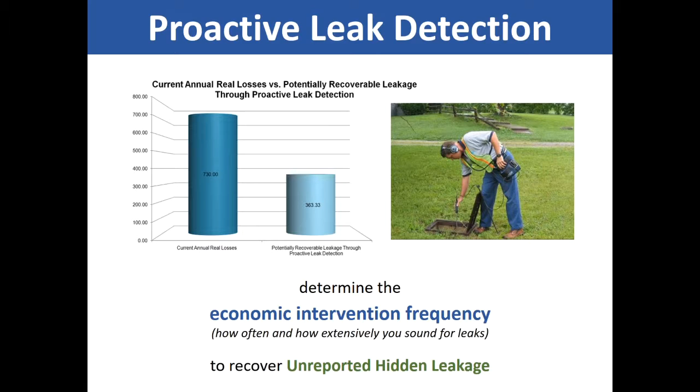So once this system starts proactive leak detection, they'll initially recover a lot of this volume of leakage. Much of it is cost-effectively recoverable for them. And then they will combat that trend of increasing leakage through time with periodic and scheduled surveying.

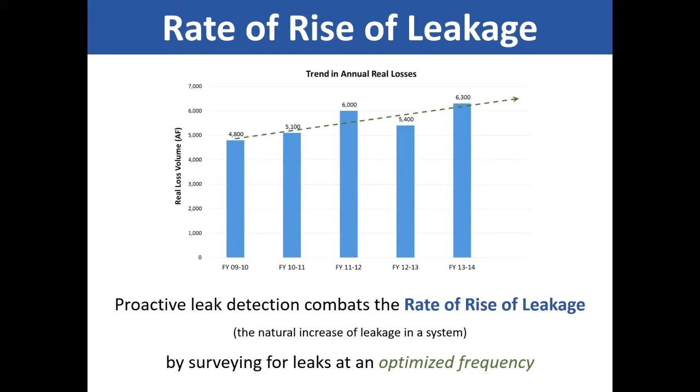Of course, when you're thinking about leakage, a lot of leakage results from overpressurization of the system. And so when you want to attend to all forms of leakage, whether background leakage, unreported leakage, or reported leakage, pressure management and engagement with your system's pressure dynamics will serve you well. Pressure management and optimizing the pressure dynamics of your system will reduce the frequency of your breaks, as well as reduce the volume lost to each instance of failure.

You'll want to think about how you know the pressures in your system before you intervene and change your pressure dynamics to the extent reasonable and effective. The important part of pressure management is to identify areas that are overpressurized, which is best accomplished with some field surveys and with some hydraulic modeling, such that you can appreciate where there is opportunity to reduce pressure and therefore reduce break frequency, leakage losses, and extend infrastructure life.

Pressure management and engagement with system pressures also offers other benefits. For example, by studying your system pressures, you may identify pressure transients or water hammers that you didn't know about that are nonetheless damaging your infrastructure with each occurrence. Those sorts of findings are often unexpected benefits of engagement with system pressures.

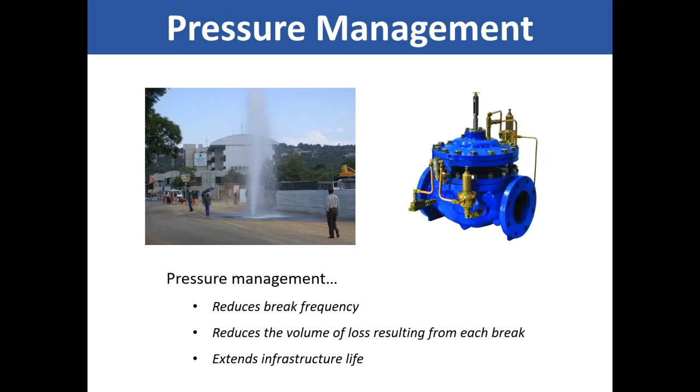As I mentioned, pressure management, of course, reduces the frequency with which your infrastructure fails. And there are some studies out there that suggest both the break frequencies that are typical and that are optimized. And if this is of interest to you, I encourage you to delve into the component analysis Water Research Foundation 4372 model that does aggregate studies of break frequencies to describe typical and optimized performance.

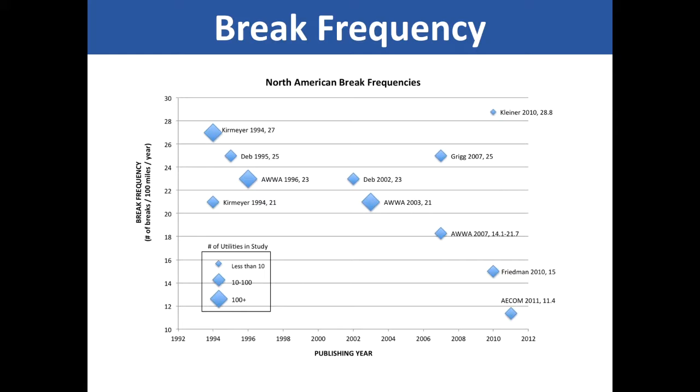Lastly, in the realm of reported leakage, leakage that you've already come into contact with and contained, in future years, if you'd like to reduce that volume, your best tool will be improving your response times, such that the leaks that you do attend to, that come to you and make themselves known, are repaired faster, and the losses to each instance of reported leakage are less.

Usually, folks will accomplish this by increasing their capacity for repairs and by hiring additional field crews to attend to leak repairs. But it's also possible that some adjustments to procedures and protocols that govern leak repair, like prioritization of leak repairs, as well as the data management and allocation systems for leak tracking, can be streamlined such that you attend to leaks faster and more efficiently. But simply put, faster, better repairs reduce leakage volume, and should your reported leakage compose a large portion of your total leakage, increasing your capacity for repairs can be beneficial.

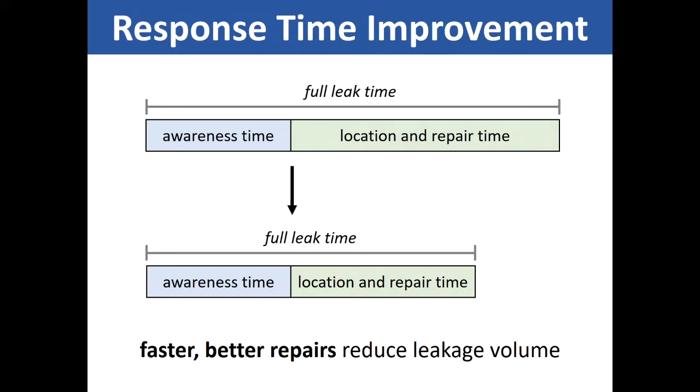Once you've thought about the types of leakage in your system and valued the interventions against those volumes of loss, you have the chance to design a water loss control program that can be refined with years of use and help you to achieve a cost-effective level of water loss. We started in this whole workshop with determining volumes of loss through the AWWA water audit. The water audit gave us a breakdown of the total apparent loss volume and the total real loss volume, but didn't go much beyond that.

To get a deeper insight into the leakage profile of a system, you have to do a component analysis. It's also helpful to think about the sources of apparent loss and the particular metering populations that are contributing to under-registration and revenue loss. And all of those component analysis activities are deeper analyses and engagement with data that provide the information that you need to do a water loss control program.

Once you understand the types of losses occurring in your system, you can then evaluate the economics of water loss recovery. You'll want to think about how you value your water losses. Typically, apparent losses are valued at retail rate, since more accurate customer meters would likely produce more revenue for you at retail rate. Conversely, real losses are valued in a variety of ways. Most utilities start by valuing real losses at production cost, simply to acknowledge that by containing leakage, they do not have to supply as much water into the system.

It's also possible, though, for real losses to be valued to incorporate things like avoided liability from repair of catastrophic failures, or to also consider things like marginal supply development. If you contain your real leakage losses, does it mean that you can defer constructing a well? Perhaps, and perhaps that should be incorporated in your valuation of real loss.

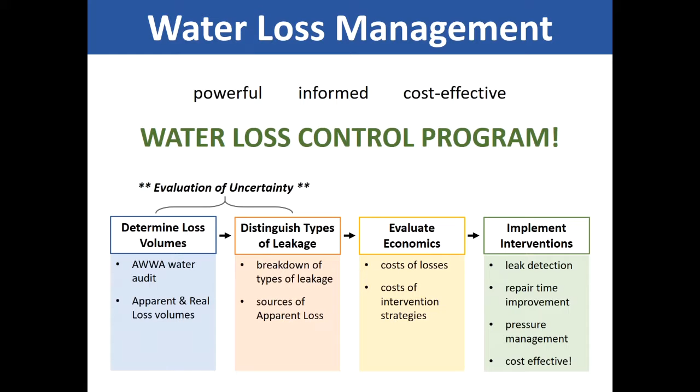With that, we'll pop over to case studies. Before I do that, does anybody have any last burning questions about water loss control program design? We tend to encourage folks to think in terms of multi-year scales versus months or decades. A lot of folks will design their first programs to happen over 3 or 4 years as a starting point.

All right then. So the case studies. The Alliance for Water Efficiency received a grant from the Charles Stewart Mott Foundation, which is located in Michigan, to look at what community-scale water challenges can be addressed through water loss control. And on the surface, that speaks to system management and distribution efficiency, but it also has implications, for example, for ratepayers and for the public. When a system is efficiently run and isn't incurring excessive water losses, the ratepayers receive the benefit of efficient rates. And so there's certainly the utility-specific focus of maintaining infrastructure of integrity, and that is efficient, but the public benefits from that exercise as well. So that was one thing we were thinking about.

And also, how do we have this regional conversation about what our water's worth and what we're doing to steward it? The Great Lakes are a national treasure. I know, having actually jumped into all 5 of them, that there's something to be protected. So that's why we're in this room for this workshop. There'll also be this webcast available online after we do this. Publication materials will come out related to this project, and we hope that you'll just keep your ears open for subjects of water efficiency and water loss control.

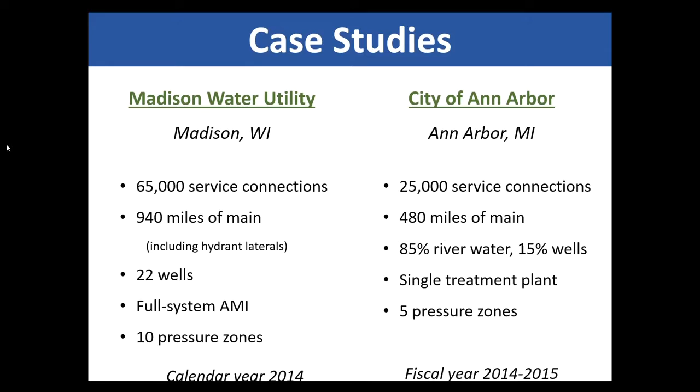So our 2 case studies, Madison and Ann Arbor. Thank you, by the way, for participating. Very appreciated.

So to jump right to the chase, we walked through the process of a water audit and a component analysis for each of them with their individual data sources and got different results. As we think about data, I'd like to first discuss some of the things that were wrenches in our analyses.

With Madison, it was this billing transition in the middle of the audit period where their AMI system went fully online. It had been installed up until that point and then happened in the programming sense during our audit period. And so there was a migrating of billing data systems and a change from a less than monthly billing frequency to a monthly billing frequency. And so we had to figure out how to make sure that in the process of transition we weren't duplicating volumes or dropping accounts or finding ourselves with mysterious gaps and zeros.

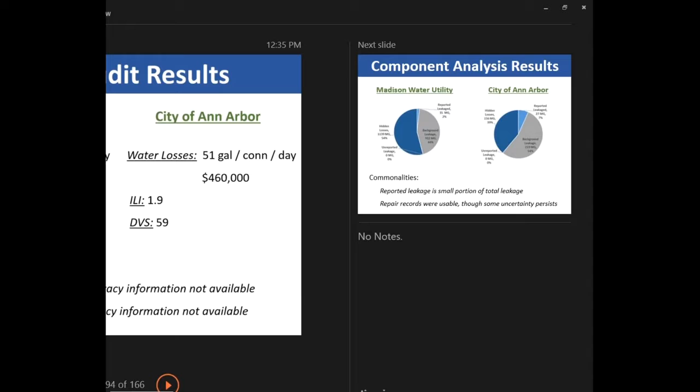And so we did actually find, in working with very raw billing data, like a single record per bill, so on the order of perhaps 1 million rows in our final file, that compound meters had been duplicated or appeared to be duplicated in our raw billing data export, wherein because each meter had 2 registers, we received 2 entries, but the billing software program summed the volume across each register and then duplicated that. That was something that we had to figure out what we're going to do about.

And it's worth noting that if you do work with raw billing data, things that you may see in the raw data may not actually have manifested in the bills that you sent to customers. The billing software often has internal cleanup processes, and your billing folks in that process probably deal with that as well, but then when you go to that initial base data table and pull stuff out of that, there could be some funkiness going on in there. So it's an interesting chance to interact with the billing process and the software settings. That was something we had to work with Madison.

With Ann Arbor, we had an interesting situation at their treatment plant where we pulled SCADA data to describe their 4 effluent meters and realized that the volume we were looking at was just massive, and it didn't at all compare well to what they were selling. And we, in talking with their treatment plant operators, learned that they have a scenario in which, depending on how they're balancing demand across their zone, they have a valve that they open and close at their treatment plant that either will put meters in parallel or in series and may duplicate volumes in the process.

And the question is, well, when was that valve open and when was that valve closed? And we had no record of that. So we didn't know when the meters were registering independent volumes and when they were registering redundant volumes. And so we had to work with records of pumping wattage to figure out which pumps were on related to the valve position. And it was a rough proxy, but it sort of got the job done. But still, with that sort of information, the results of our audit are uncertain. And so now moving forward, Ann Arbor has an Excel spreadsheet where they note the position of the valve on a daily basis and indicate when they open it and when they close it.

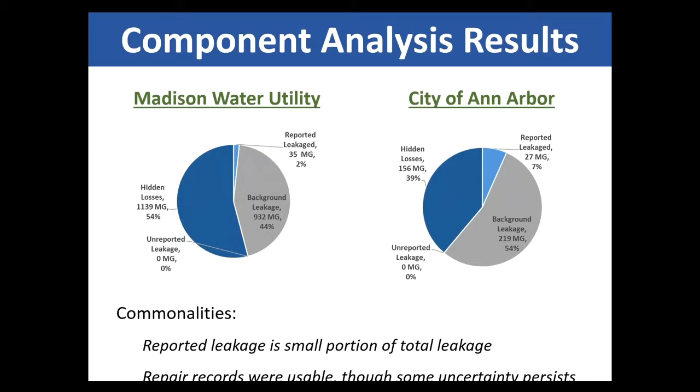So recommendations moving forward. With Madison Water Utility, there was enough ongoing hidden leakage in the system that it would be cost effective to clear the backlog of leakage. The value of the leakage is in excess of the cost of intervening against it. And so the recommendation is start doing leak detection and focus initially on the zones where you suspect leakage is worse and go from there, refining your leak detection as you learn about the leakage in your system.

With Ann Arbor, the value of leakage was less than the cost to intervene against it. And so our recommendation there is to continue to do this exercise of compiling a water audit and doing a component analysis to track it such that when those hidden losses accrue to a point where it's break even or cost effective to do leak detection, they should do that. So when you do a water audit, it may suggest that you should jump into the field and start acting, or it may suggest that your best approach is monitoring. But that sort of thing you can't know until you do this investigation.

For both, we recommend considering zonal management of leakage. When you think about deploying leak detection, it feels like a little bit of a shotgun approach to say just do the entire system periodically. It's effective, but it's also expensive, and it may behoove you to focus on smaller zones, especially those where leakage is greatest. And you can do that, either in a discrete or in an open manner, by monitoring all inputs into a zone, appreciating customer consumption, and having sort of small zonal water balances and doing a water audit for part of your system so that you can figure out where the leakage is most severe.

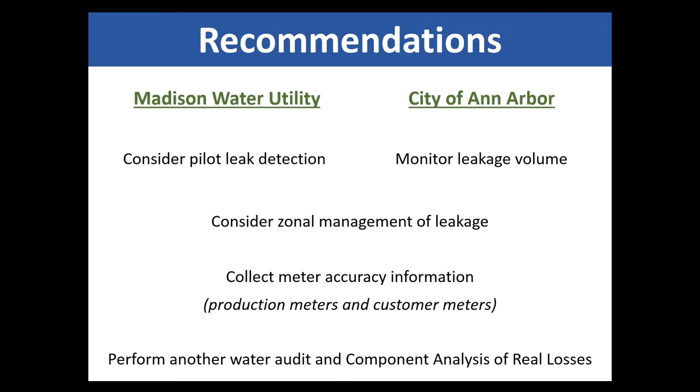And I promise that once you do this once or twice, it gets easier and the data pathways that you use get a little bit more greased and people get accustomed to thinking about the system in this way. And then takeaways more broadly. You've heard us say this all day, but I think that these two case studies prove this. Data doesn't have to be perfect in order for it to be useful. You can learn from imperfect data. You can learn from the gaps in your system's measurements.

The water audit can accommodate your system. I promise you that it can. You will just have to work with your colleagues to figure out the best way to do that. And I'm sure that you have a lot of internal resources, both in terms of the history of your system and the expertise of your peers to figure out how to use the water audit once you have a broad appreciation for how the pieces fit together.

Secondly, as is the distinguishing factor between Madison and Ann Arbor, the water audit and the component analysis and the economic modeling may suggest that immediate water loss intervention is to your benefit, or it may suggest that it's better to take a monitoring approach and watch and be ready to react when cost-effective opportunities arise. But you can't know that until you dig into your data and until you measure your system's efficiency and think about how much your water's worth. So information in this instance is your friend.

You need a component analysis of real losses to plan water loss control. Had we just taken the total volumes of leakage for both systems from the audits and attached a dollar figure to them and said, go after it, we wouldn't have known where to go. And so it's important to work on leakage profiling once you've got your audit in a place that feels good.

And then lastly, there's no one-size-fits-all approach. We encourage both utility folks and their regulatory peers to remember that there is no prescriptive plan that works for everyone. All systems have unique costs, unique physics, unique inherited data and structural challenges that make water auditing a very individual process. So those are the broad takeaways from our work with both Madison and Ann Arbor. I encourage you to speak with Tom as the Madison representative, and can certainly put you in touch with the folks at Ann Arbor if you're curious what their experience of this was.